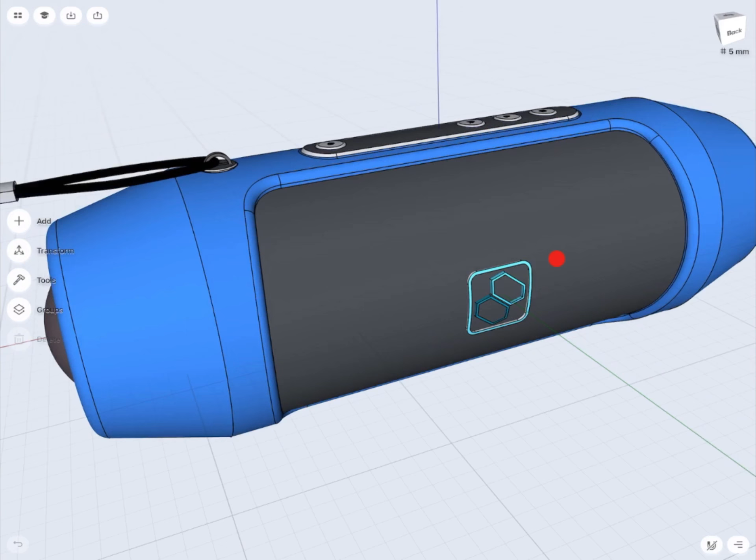Welcome to my lesson. Today we're going to make a speaker tutorial. We'll go through a couple of stages and repeatedly use them to make different parts of the speaker: the speaker itself, control panel, safety strap, and the logo. We'll use extrude commands, revolve, sweep, and loft on profiles we make as sketches, learn how to use a coordinate system to operate our design, and use planes, modifying them to draw sketches on.

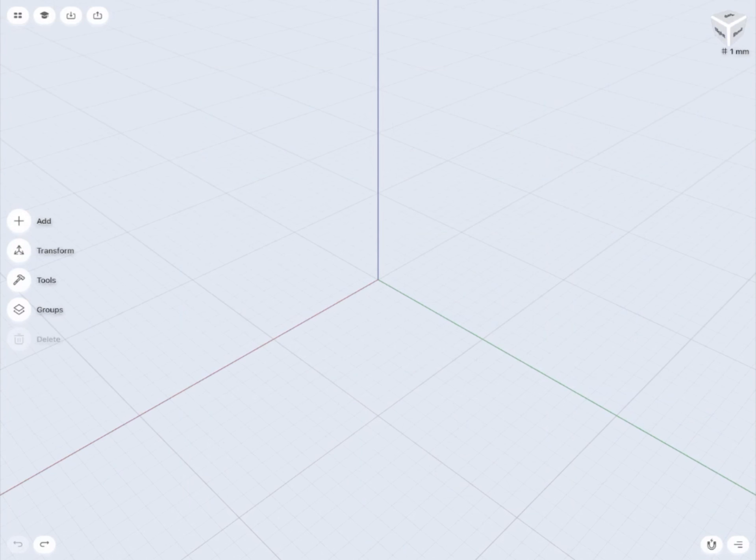Let's start. First we're going to open a new file and start to make our speaker profile. I'm not going to make a whole speaker, so I'm going to use the revolve tool, so just half of it is enough. You can use dimensions as I did, but you can also measure your own speaker at home and try to copy it.

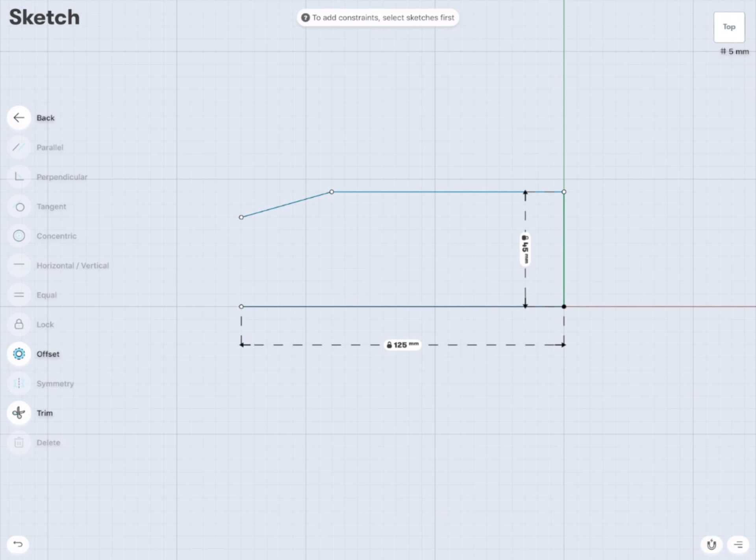Basically all we need is just a quarter of our speaker, because it's symmetrical in two axes. So the sketch I have right now is actually enough to start making the speaker. Now I need to make a mirror. Be sure to select copy from the top left box. Then you can use the revolve tool to make the shape of your speaker.

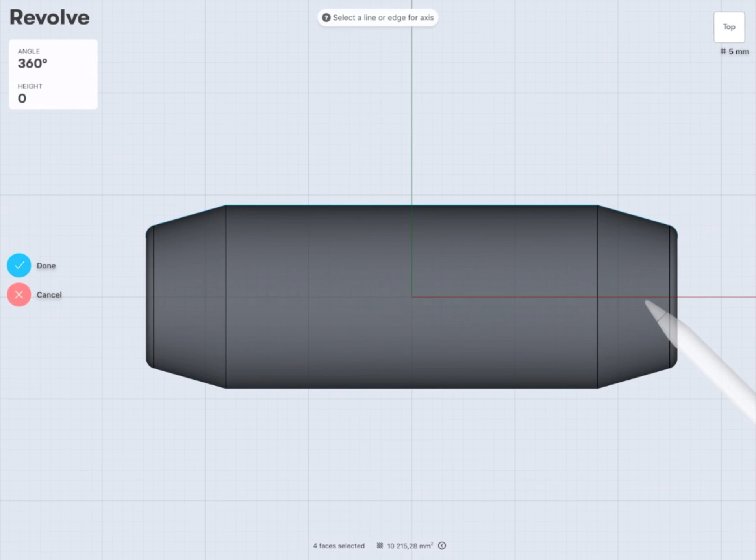So now we've got it. This is the basic shape of my speaker. I think my bass speakers are a little too small, so I'll delete one and try to scale it a little bit.

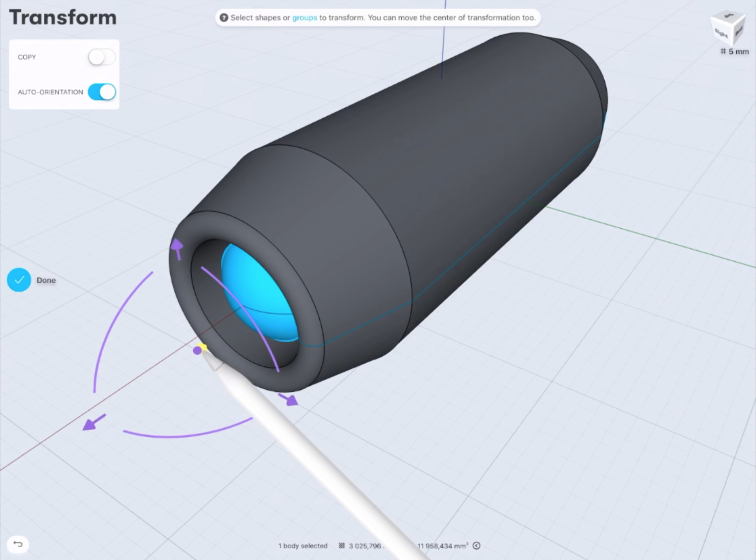I have to put my center of transformation inside my shape because it's round, then I'm going to scale according to that point. This is important because otherwise you will lose your symmetry. I'm happy with that.

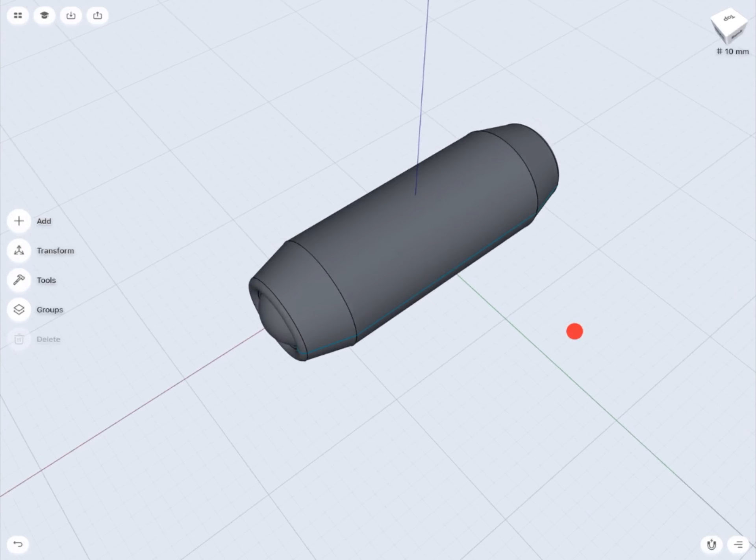Now I'll create a line. As you probably spotted, I've put this line on the axis, and this line helps me to make a mirror of my bass speaker.

Now I need to put the bass speakers on a layer because I don't need it right now. If you want to rename a layer, you just need to swipe your pen to the left, and then you are able to change the name.

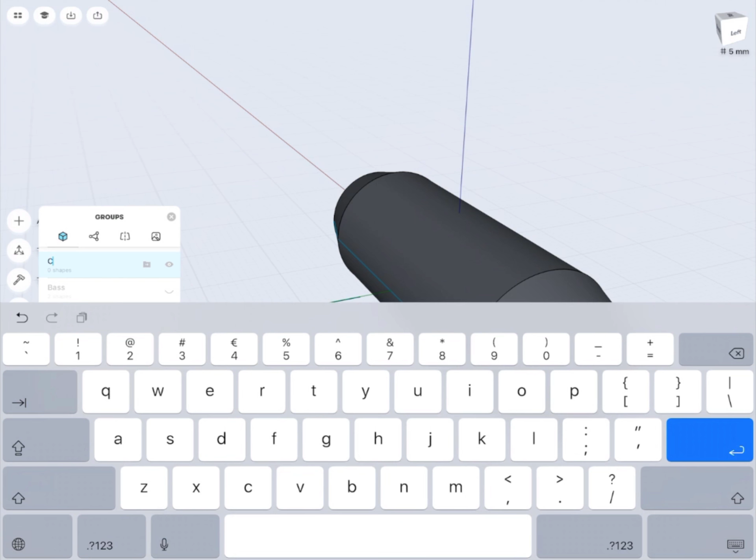For future purposes, I'm going to create a new layer, and I called it cut tool. So from now on, anything I create will be a cutting tool if I'm selecting the groups, for example. You'll see later how it works.

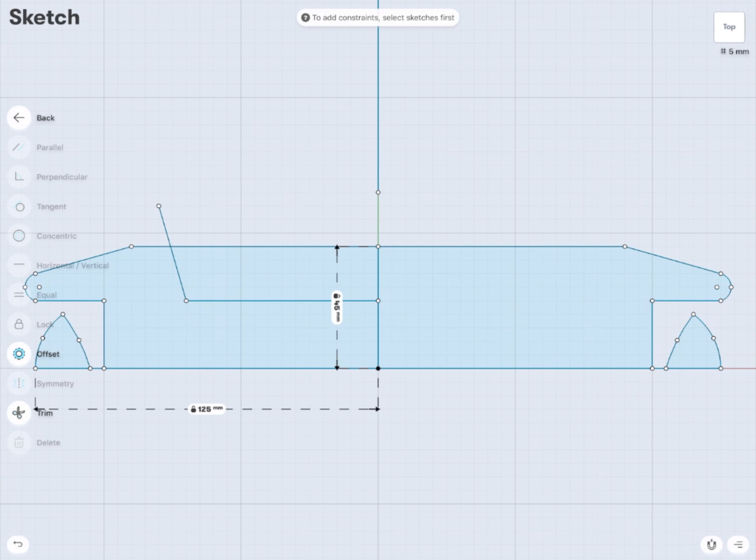Okay, let's start to create the speaker shape. This is going to be a profile of my speaker. I'm going to adjust it a little bit, and now I need to mirror that because I need it to be symmetrical. Don't forget to select copy from the selecting box.

Okay, we're done. Now I'm going to extrude that shape. As you see, it's placed on the cut tool layer. If I unhide my speaker, I'm going to use it as a cut tool to cut from my speaker.

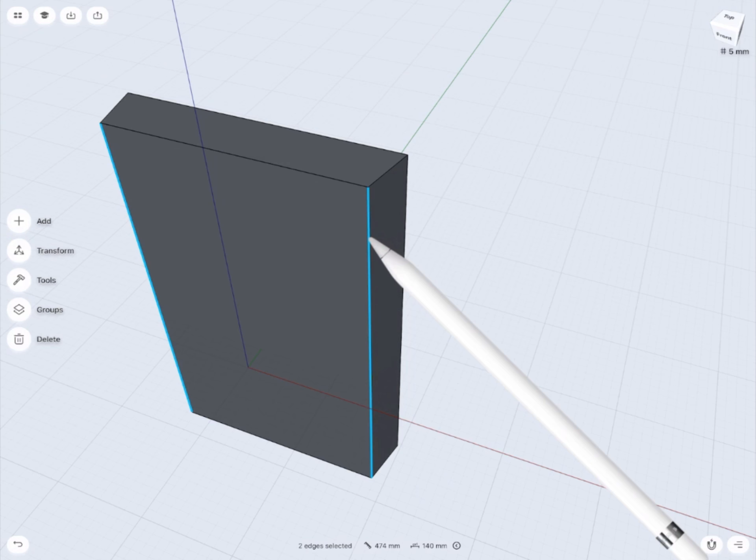I think I'm going to make a little bit of filleting because it's not that sharp, so I'm going to just fillet that. Then unhide the speaker, and now I need to make a mirror to the other side of my symmetrical speaker.

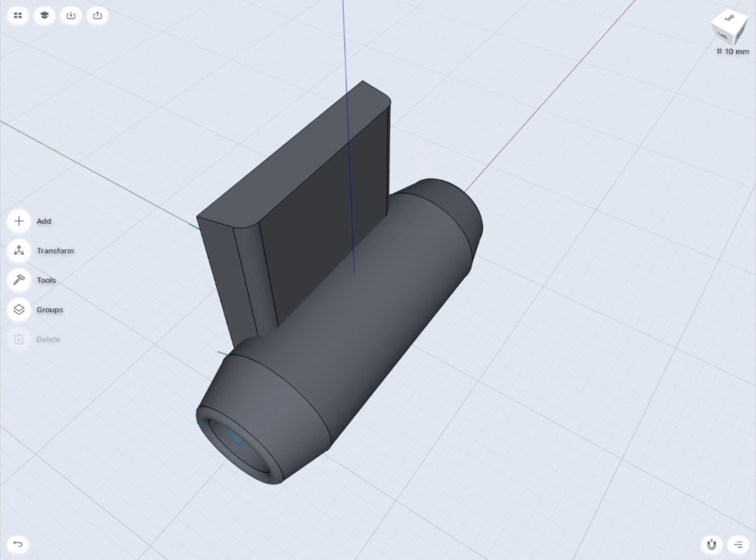As a constraint to help you mirror this, you can use existing sketches or an existing line, as you see right now — I've used the sketch I previously made. Now I can subtract, but remember to first select the object you are subtracting in, and then the object you are subtracting with.

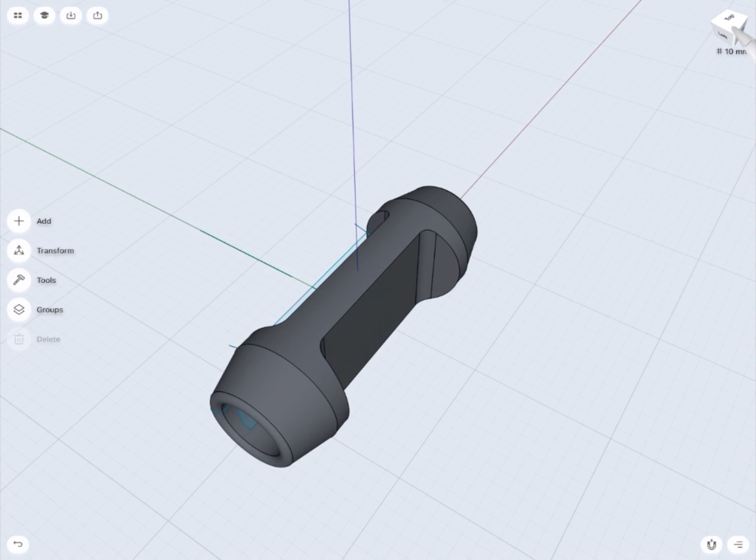Now I'll create the round shape to make it infill like a net for my speaker, aligning it to the speaker — as you see, it's actually automatically snapping. I like to lock the middle of my sketch, so to do it I just select the center of the sketch and press the black lock, and then anything I scale, which I'm doing right now, will be according to that point. So extrude it, just press and pull.

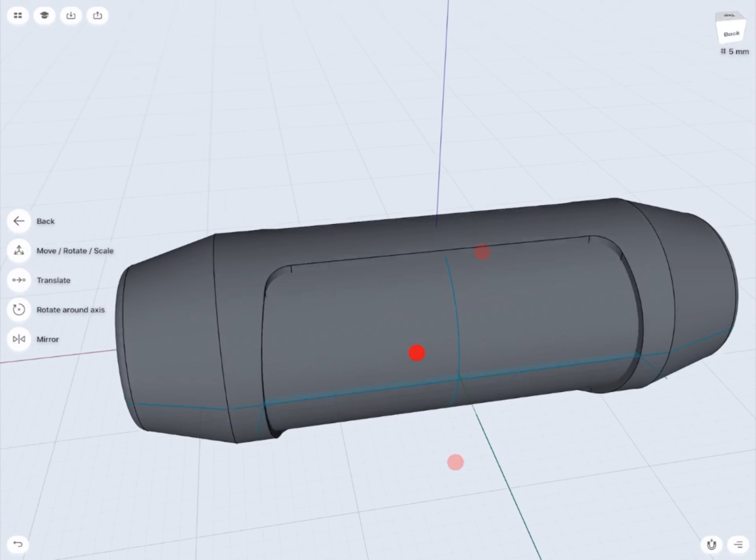Now I'm going to select the edge of my speaker and make small fillets. As you see, you don't have to select the whole loop, you just need to select one edge of it, and then the selection is automatically applied.

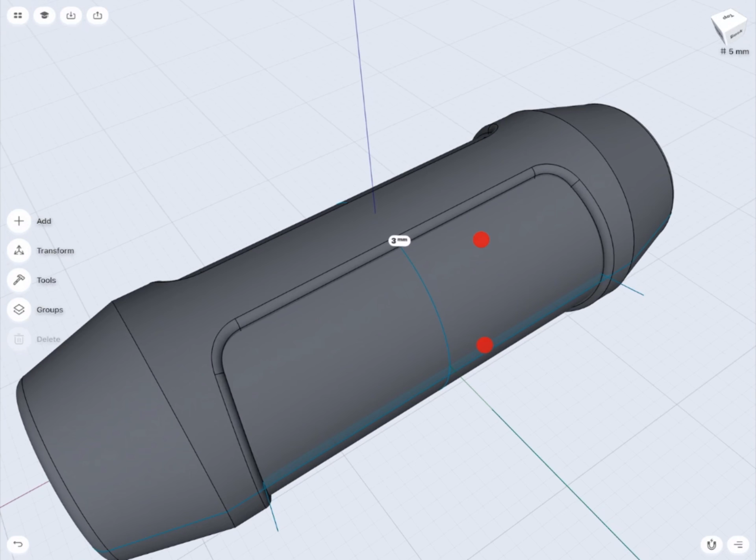So now I just need to merge them all together. To do it, I need to make a union, and now it's one part.

So my speaker shape is done. Now I need to create a control panel.

To do it, I need to create a construction plane. To do so, I will create a line, and out of this line I'll create a plane, and I'll do it through edge by selecting a certain angle.

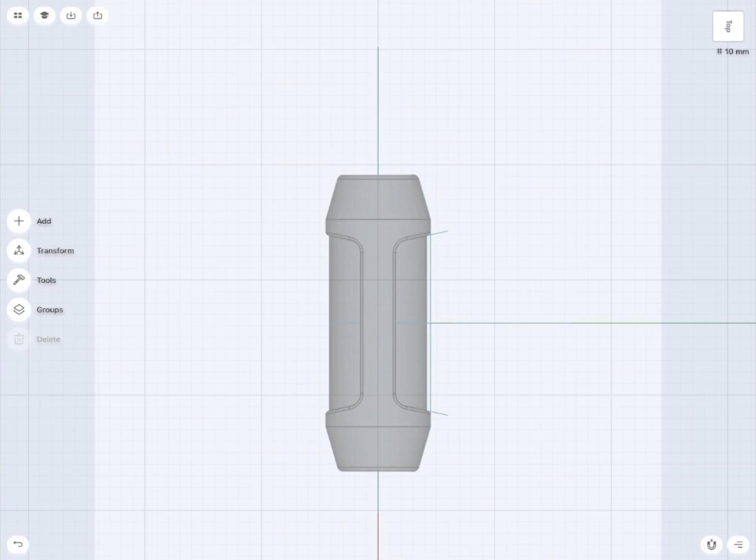I like that feature of moving planes anywhere I like. It helps me to make sketches wherever I want.

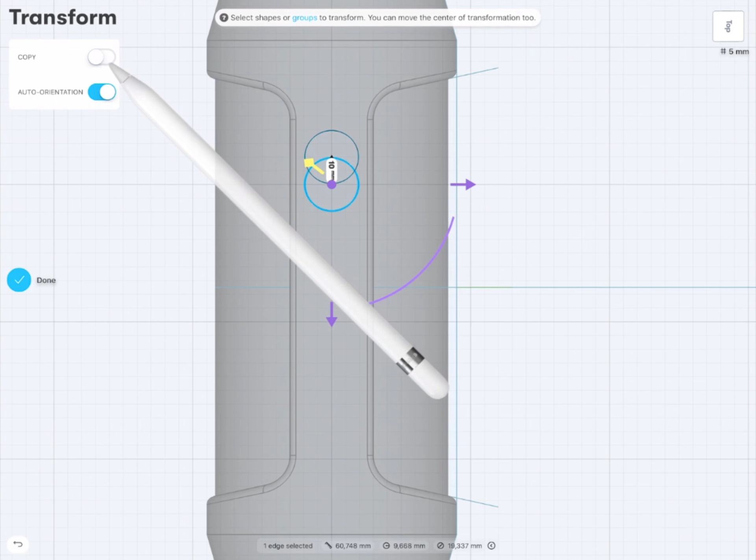So in this situation, I'm going to place the panel. First I'm going to create the base, which is the very long bar, and on this bar I'm going to place 4 buttons: stop, play, forward, and turn on off.

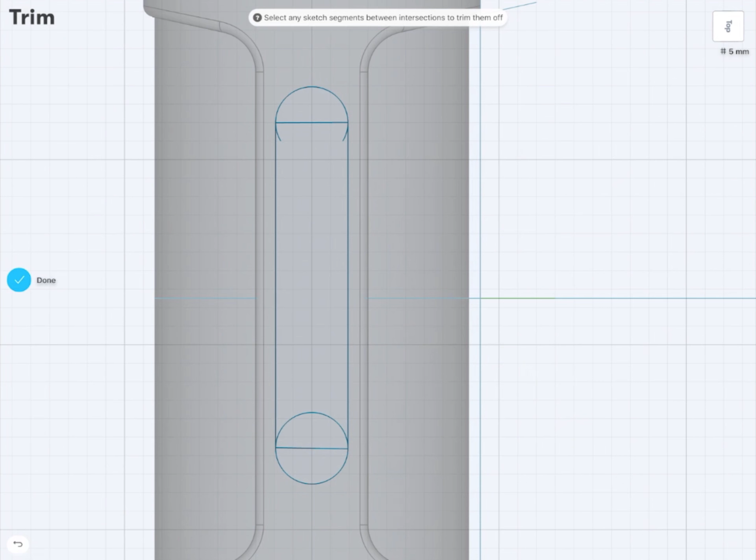A little bit of trimming. So what I do right now is offset.

So I've created this shape, and I'm going to make a very tiny gap, which is a very technical gap. And I'm going to extrude that, and subtract it from the speaker. Then I'm going to adjust the height of the leftover in the middle bar.

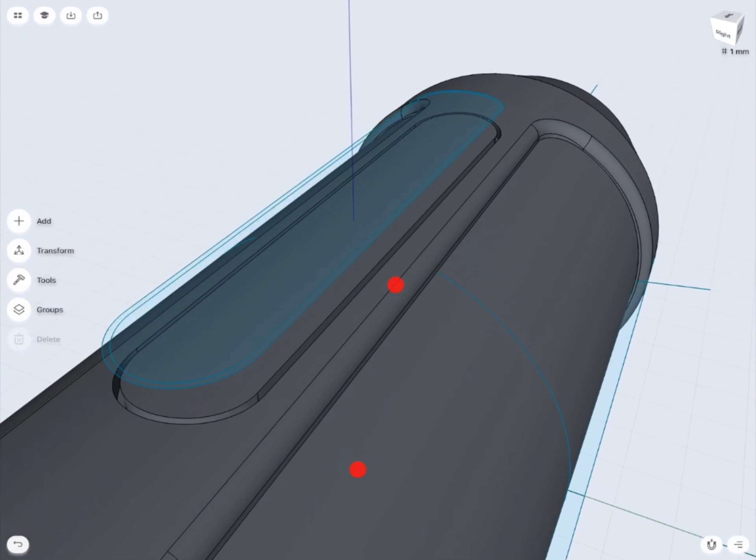As you see right now, I'm going to select the face of the inside shape, and pull it a little bit up to make it higher.

At the end, I'm going to chamfer by pulling the edge using Apple Pencil. So the chamfer will give another realistic point.

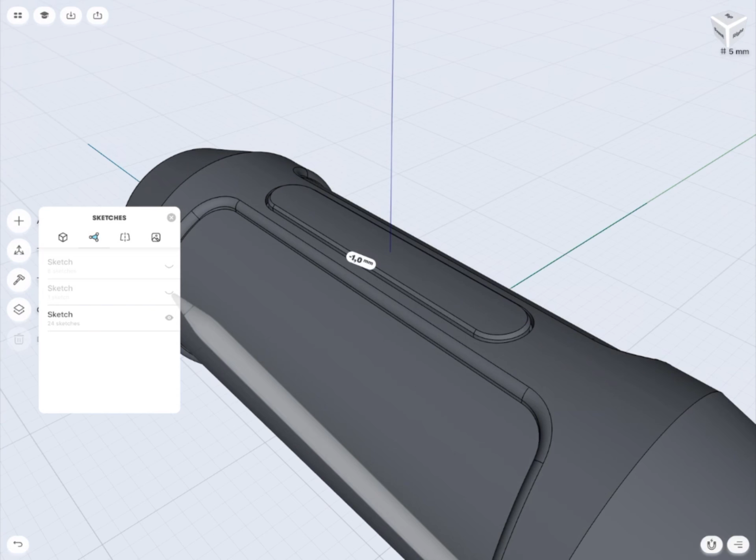Now I'm going to unselect all the sketches I don't need right now, and go back to my sketch to add some more shapes.

I'm going to create a round shape, a circle.

And I'm going to copy them 4 times according to the same gap, and make an offset to create shapes which I will use to make technical gaps.

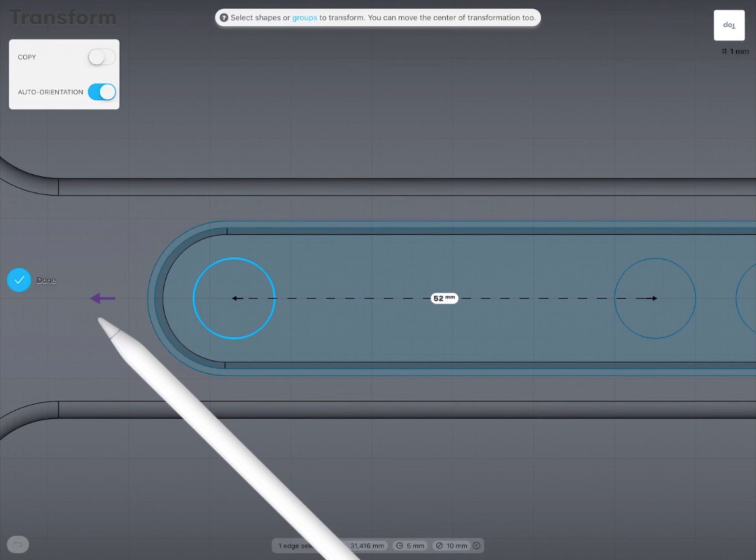So most of the commands, as you see right now, have this number box on the left top corner where you can place your specific dimension very accurately if you need it, and this will keep your design as precise as you want it to be.

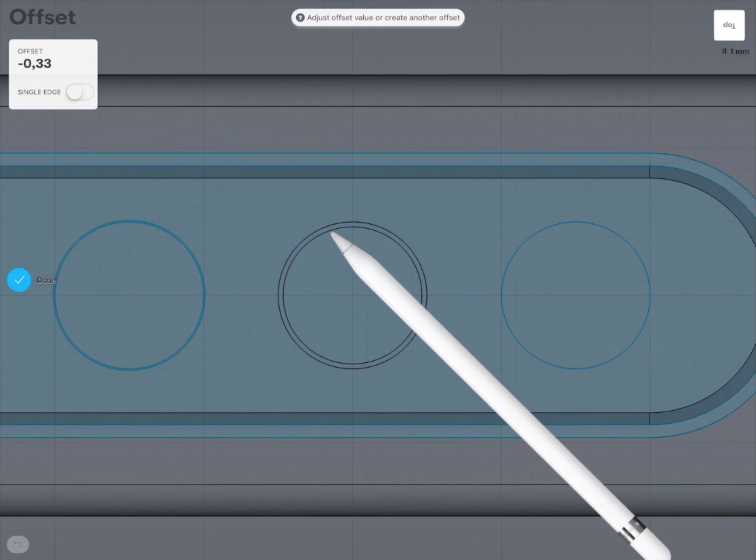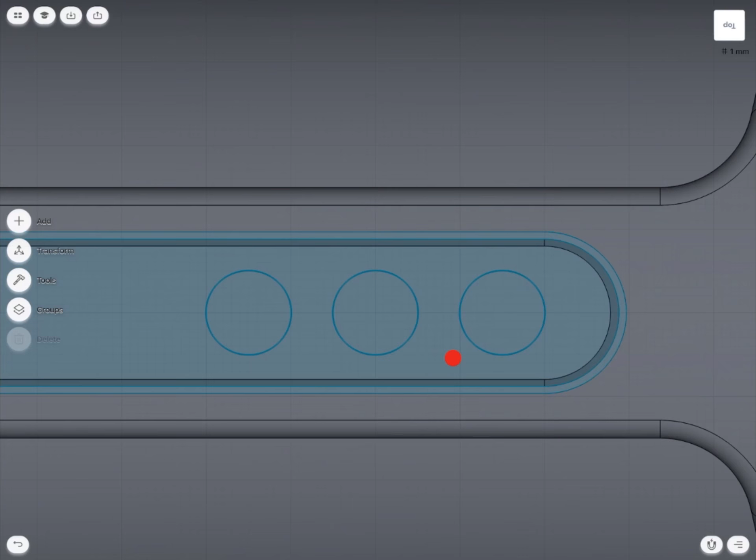So another feature I like in Shapr3D is actually the zooming. I like this two-finger zooming. You can zoom in very close to the objects you want to select, then zoom out and move at the same time. You can do it very quickly and efficiently.

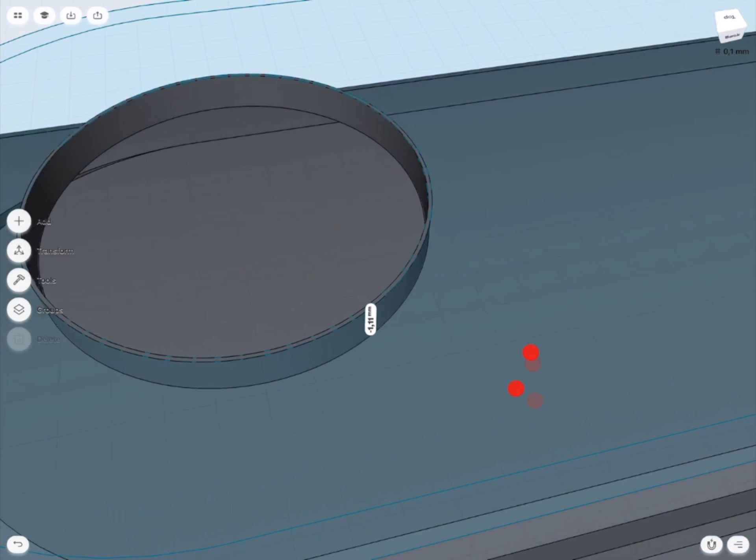So as you see, I'm going to extrude it right now, the same as I did with the bar. Anything I've created is on the top layer, which is the cut tool. Now I will show you how to cut using groups.

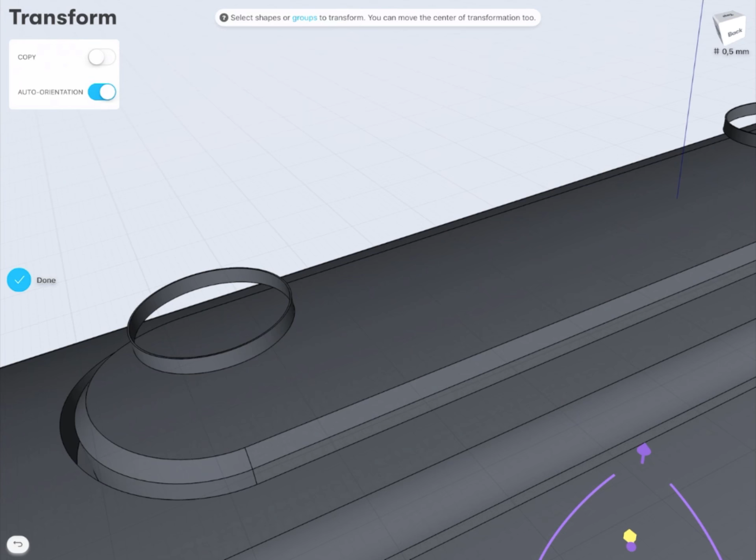So I need to transform these shapes a little bit towards the bar. I've used the group to select that object, and then I'm going to subtract, and as you can see right now, as a cutting tool, I'm going to use the cut layer, which is a layer that contains any cutting object.

And now if you get closer, you see what I've done. It's a small gap between the button and the bar. Now I'm going to select the edges of the buttons and make a fillet.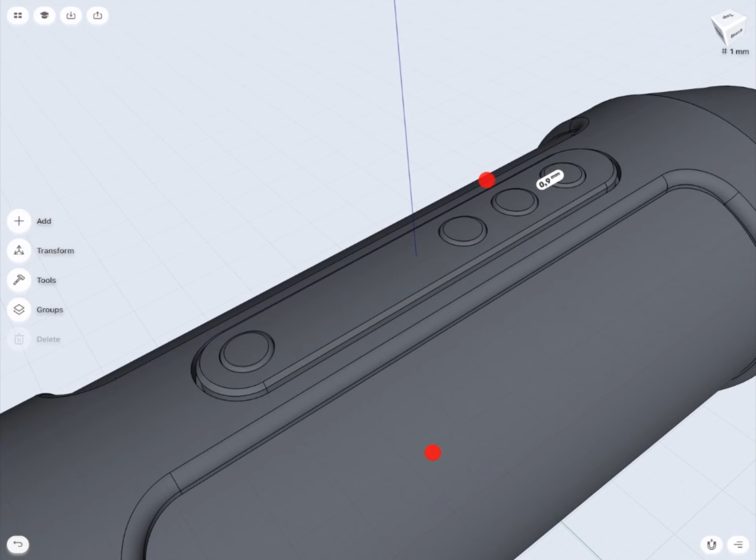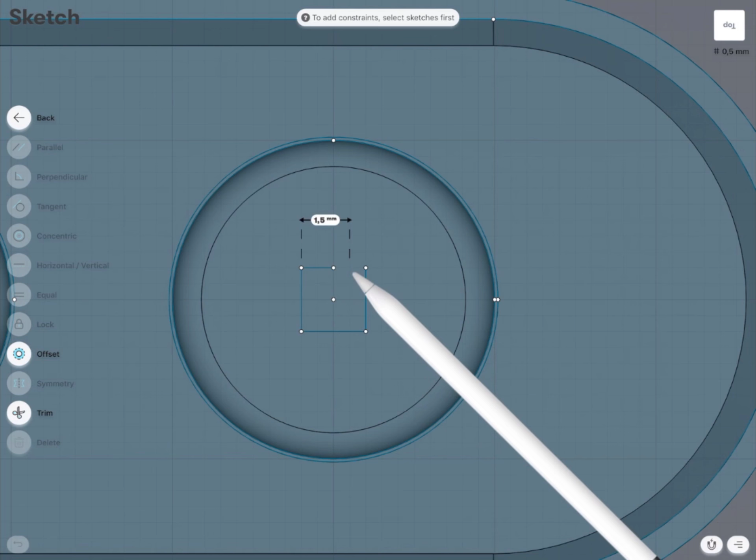So I'm going to recall my sketch, which I've been using to make all of this design. Actually, you can make the sketch in one go at the beginning of the process, but sometimes I prefer to follow my imagination and do it one by one, as you see right now. But it depends on you.

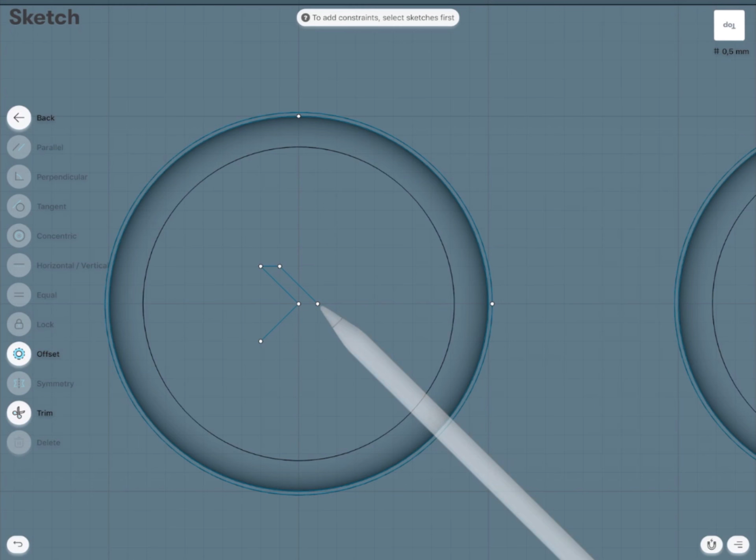So now you see how easy it is to sketch simple geometry. If you have your snapping on, it's just drawing. But if you see on the right bottom corner, there's like a magnet logo, you can switch it off if you need to make it more freestyle.

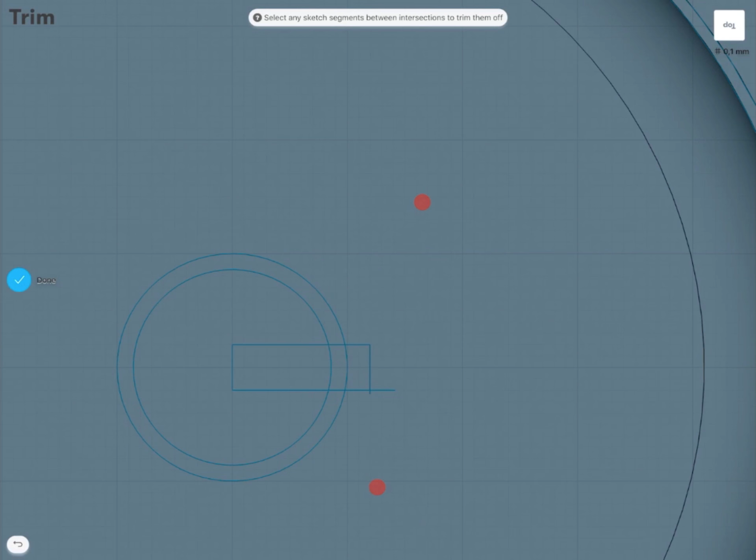So basically the sketching is very easy because all the time you're using the same tools, which is creating a line, creating an arc, trimming, offsetting, and basically that's it. Sometimes you're making mirrors, but this is from the transform tools.

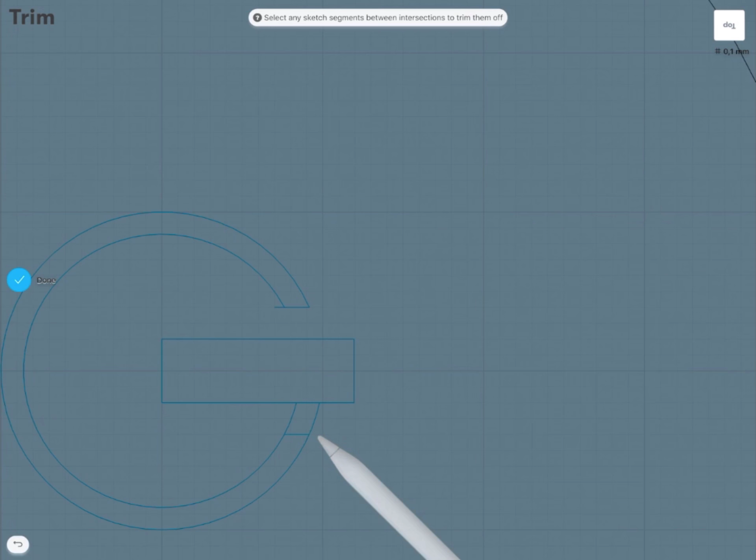So I need to select anything I've created, and I'm going to extrude it just by pulling. You just hold with your pen on the screen and pull down, and this is going to be extruded.

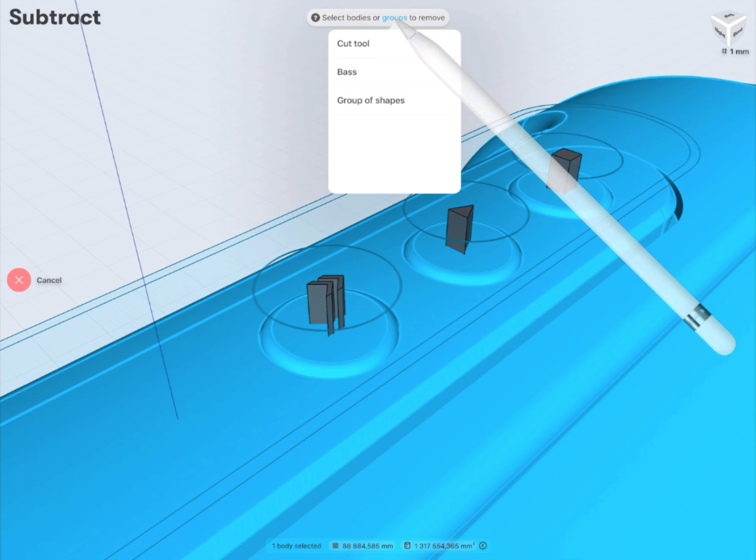As I mentioned earlier, anything I've created right now is placed on a cut tool layer. So if you're subtracting, you just need to select the group from the top, as I did right now. So it's done, it's so simple. Okay, the panel tool is basically done.

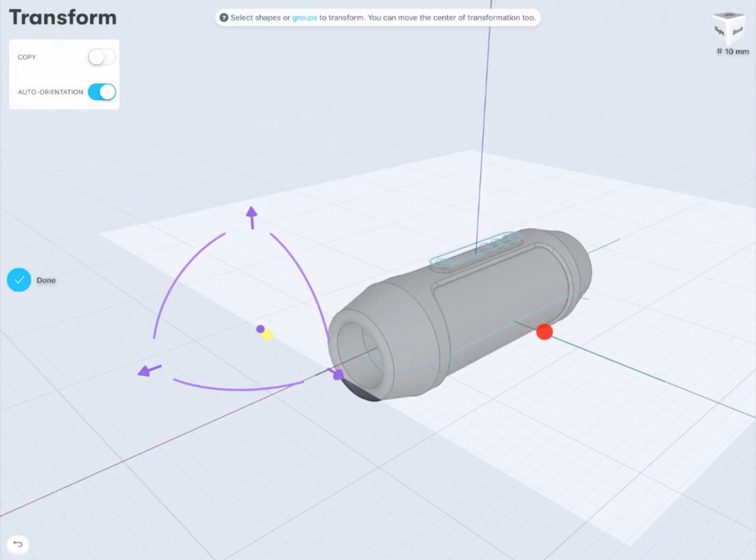So now I need to create a safety strap. To do so, I will use construction plane I've already used before. I'll just rotate this according to zero point, as you can see, and now I'm going to double tap on the plane.

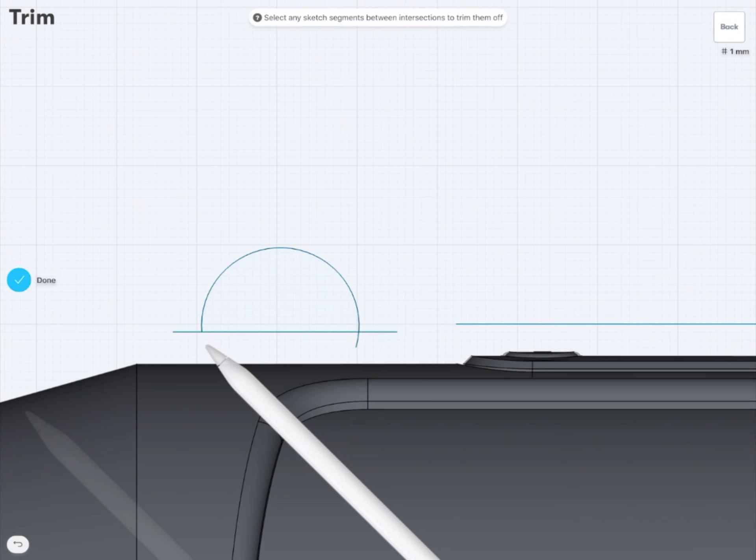Now I'm going to create the profiles to make the mounting strap solids. Basically anything I'm doing right now we already did on a previous design. So in a kind of conceptual process, I don't care to be really precise.

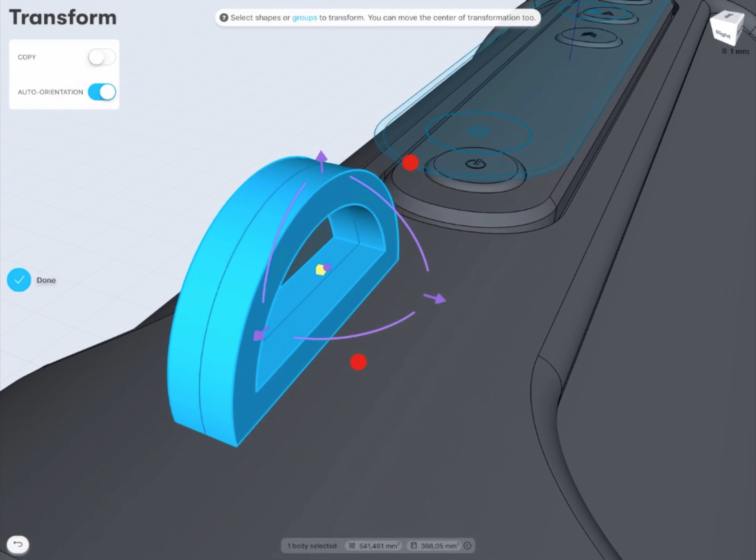I prefer to do and then to transform, so as it is right now in this situation. So I create this mounting object, and then I'm going to transform it a little bit. You can do it anytime you like. As you see, it's a little bit too big, so I'm just going to scale it according to the center point of the edge, the middle point of the edge.

So I like to do it this way because it kind of frees my mind. All the time I need to change something, I'm just doing it.

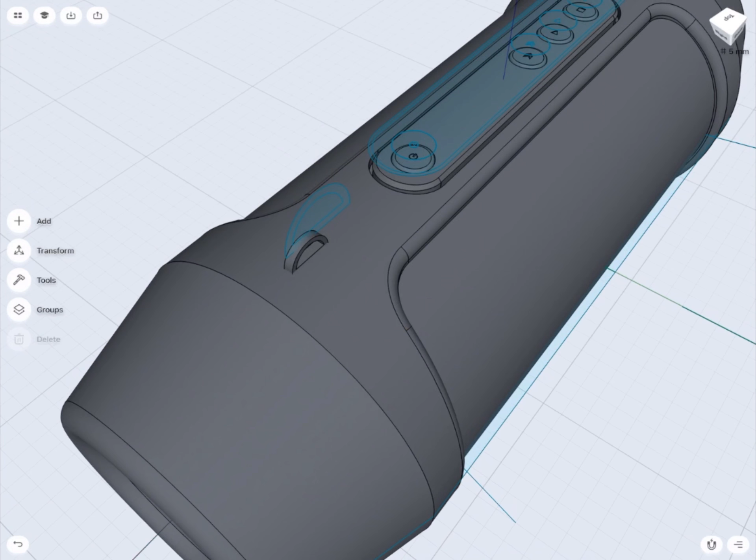So now I'm going to create the base for this mounting hook. This is going to be similar to my buttons, because I want to keep this design the same.

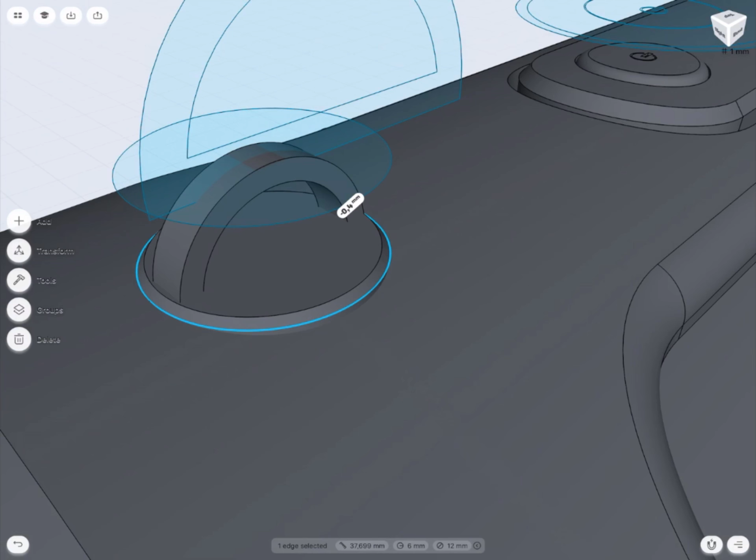As you can see, you can do it a different way, but I like to keep the gaps as is with the panel. As I told you, it makes this design look much more realistic.

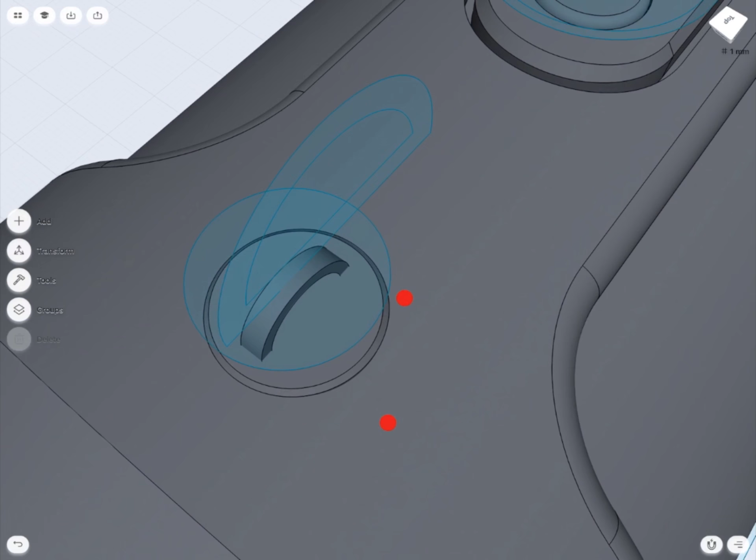And yet again, I think it might be a little bit smaller, so I can just transform that according to scale. Now I'm going to create the gaps, which first need an offset, as you see right now.

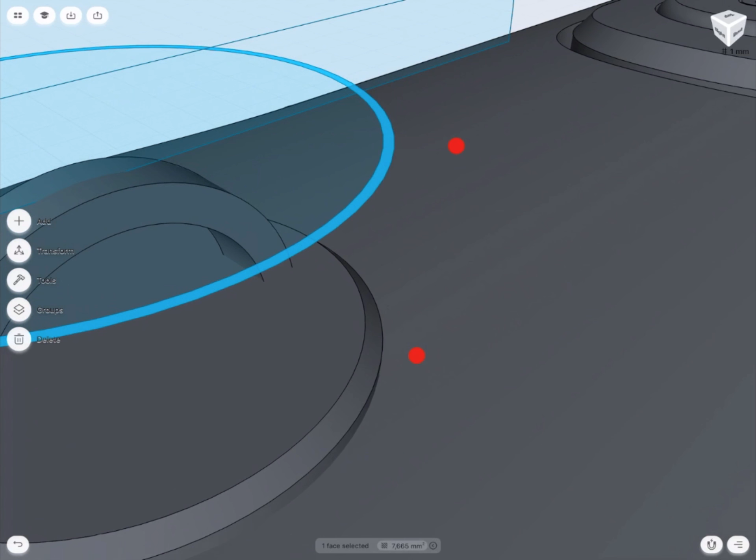Okay, it's done, it looks great. So now the next step, which is the string, or strap, however you like to call it.

So basically now I'm going to turn on the plane I've created, the strap mounting fixing object, and then I'm going to, as you can see, rotate this.

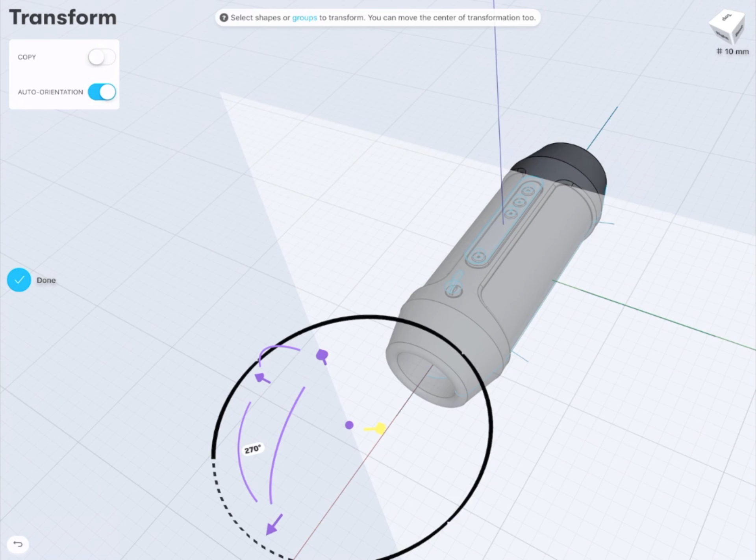So I'm going to place this plane in the middle of the strap, I mean in a place where two loops are connecting to each other with a small plastic button or something like this.

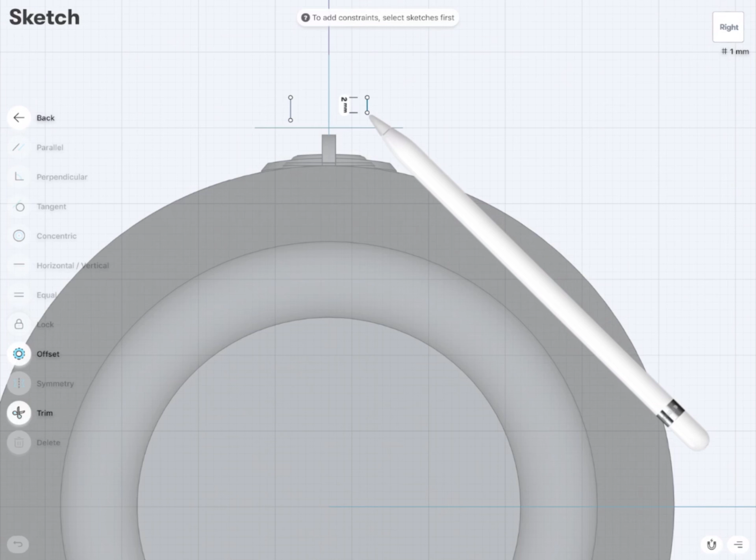So I need to create the shape of this button right now. It's going to be more squarey, so I'm going to use the arcs.

Creating arcs is great using pencil. You just need to make a slight move towards the curvature of the arc, and then the arc is going to be placed.

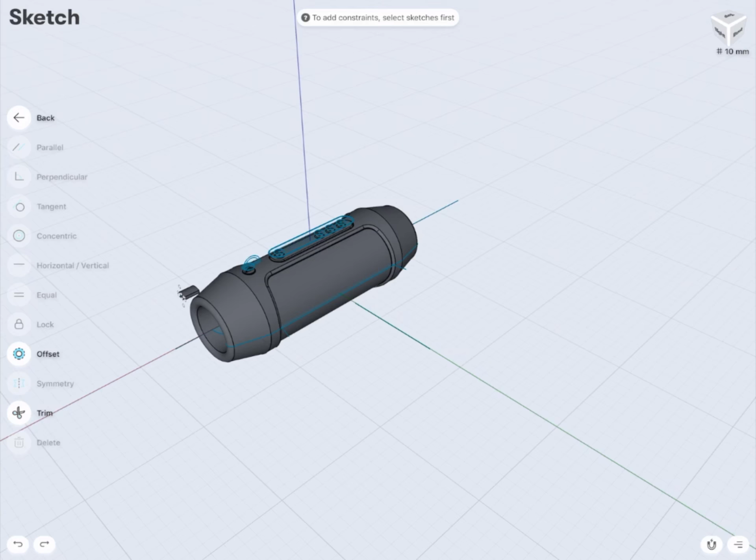So now actually I will use one of the faces of this plastic button and double tap on it, and then I'll create a sketch on it, and then I'm going to create the profile I'm going to use to make a sweep tool.

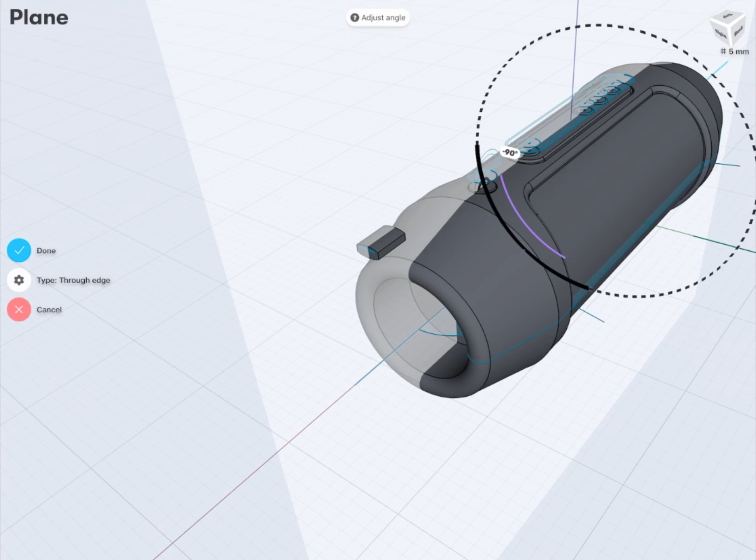So to create the plane, I'll actually borrow the line which is already created, and then I'm going to make another plane, a construction plane, which helps me make the profile of the strap, as I'm doing right now.

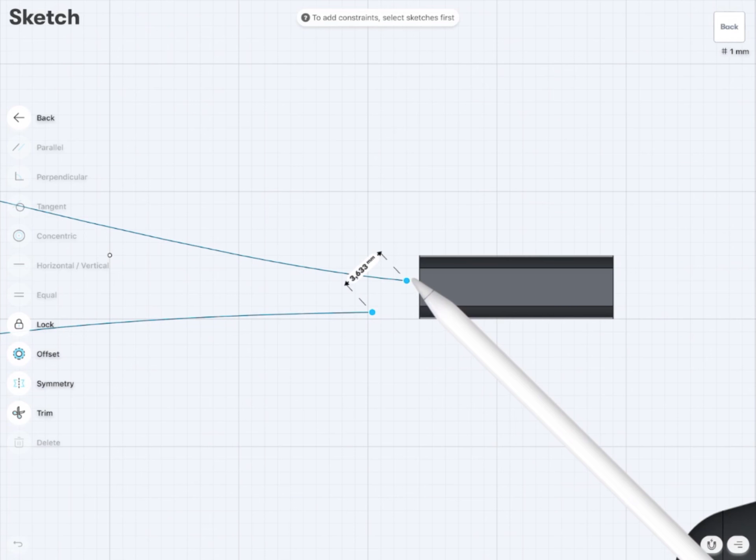So to make the profile, you just need to make the control point curve. Make this control point curve as natural as you can. You can adjust the points by just selecting them and moving, as I'm doing right now.

So remember, this is just conceptual work. You can play with it to make it as realistic as you need. And now I'm going to use the sweep tool.

Which I'm going to use for making that strap. So we just simply need to select the profile, and the profile is going to be selected according to that control point curve.

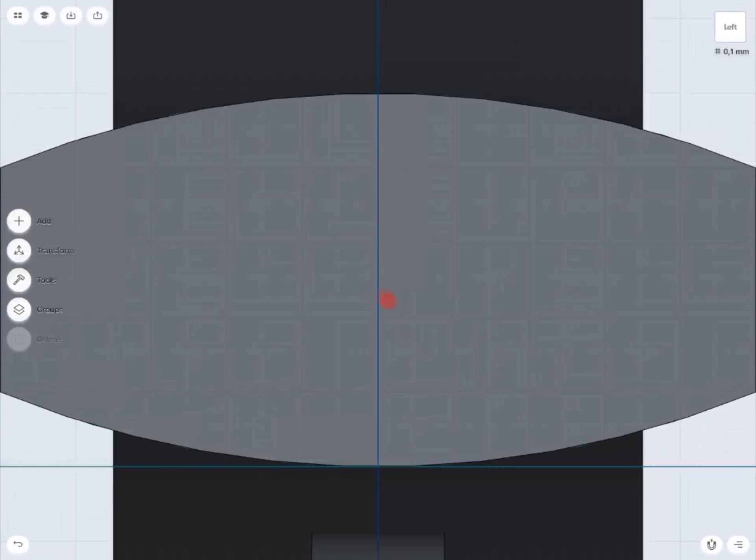Okay, and I'll do the same thing with the small strap, but this is going to be a round shape strap.

So you don't have to worry very much that the plane wasn't at the same level as your strap button. You can adjust the place of your strap later using the transform tool and move it according to the place you want it to be. And again, sweep tool and a little bit of adjustment.

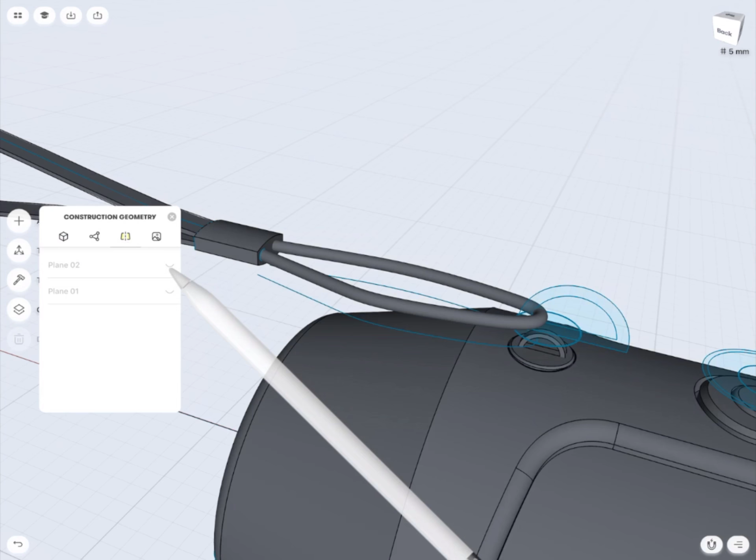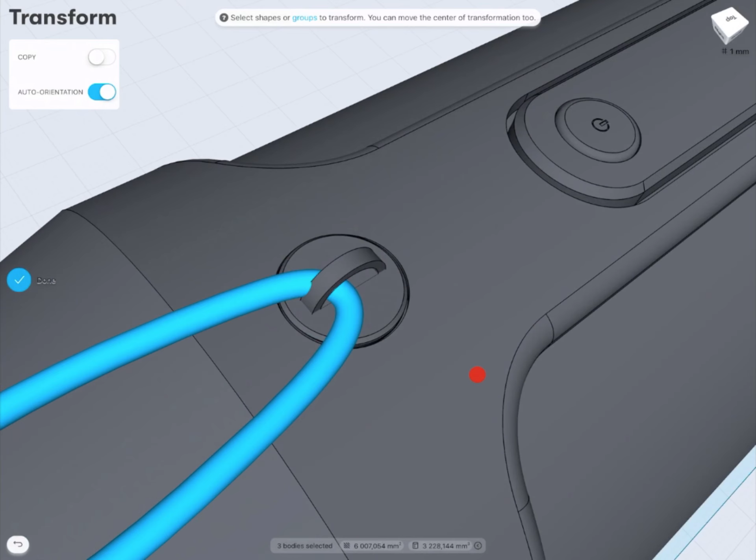So I decide to transform all of the objects a little bit towards the mounting. But you can also, in this case, rotate. You can change the rotation point, the red dot of the coordinate system, and then try to play with this a little bit more. Okay, it's done. It looks great.

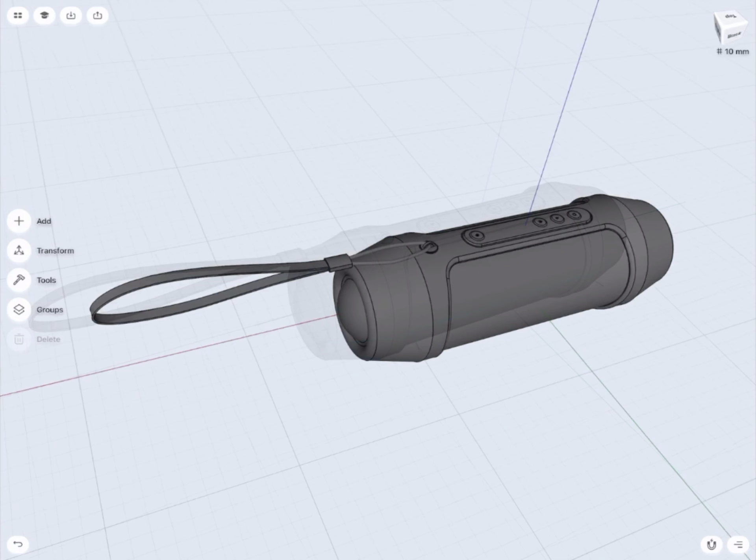Okay, so now I think it's time to make the last part, which is just a logo of my speaker. So the same, I need to create the plane. I need to put it in front of the speaker and just draw on it the shape of your logo. It can be anything you like.

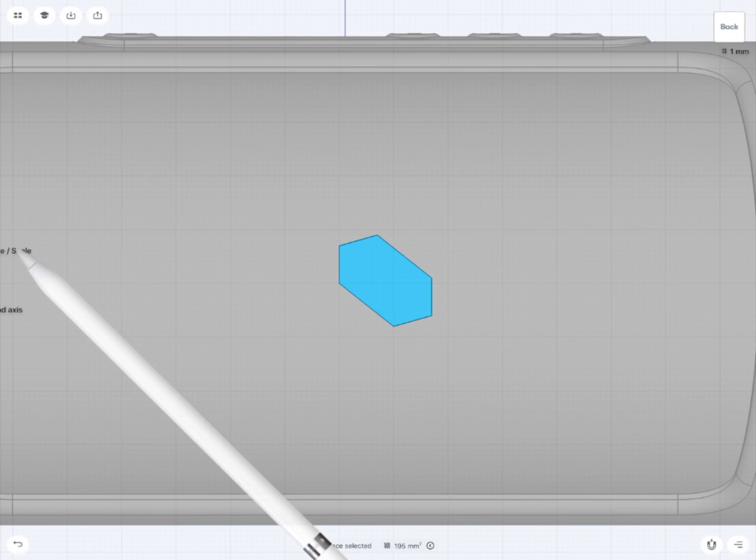So remember, if you want to make a sketch on a certain plane, you just need to tap twice on that plane, and then your view automatically switches perpendicular to that plane. So my logo will be kind of similar to the Shapr3D logo if you spot it. You can actually be creative right now and make your own logo wherever you like. It can be your initials, it can be anything.

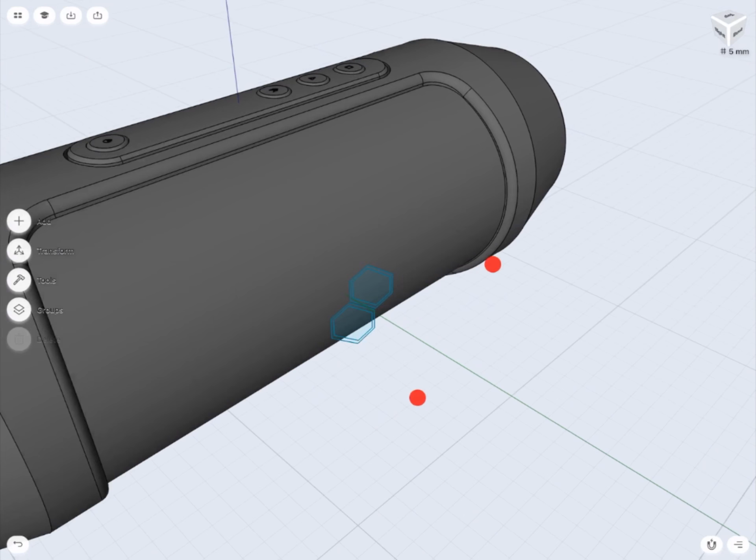So now it's time to extrude it to have it intersected with the speaker. So now I'm going to modify the logo shape a little bit to have this shape at the same curvature as the speaker. To do so, I need to create a plane, sketch the round circle according to the center of my speaker, and then cut it using intersection mode.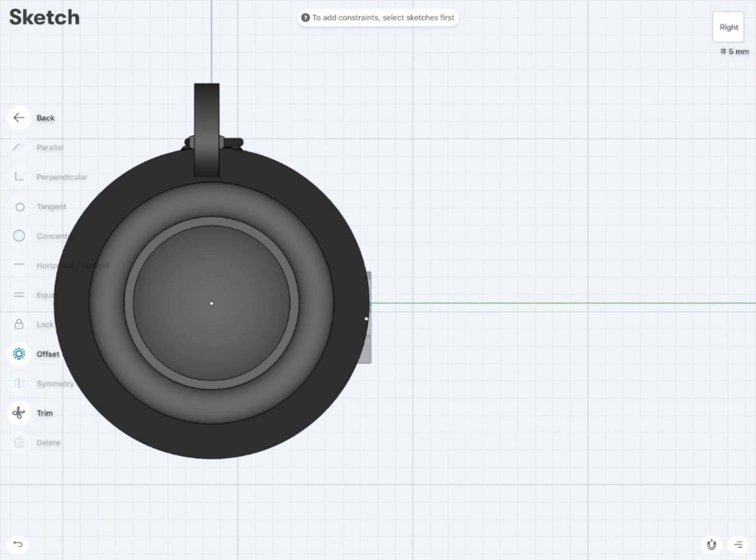So I'll create the circle. Now I'm going to turn on perspective mode, and then you see the sketch, and I'm going to extrude that. Okay, and I'm going to turn the plane off because it's disturbing me to make any operations. And I'm going to intersect as I'm doing right now. So anything that is intersected between those objects is going to be left.

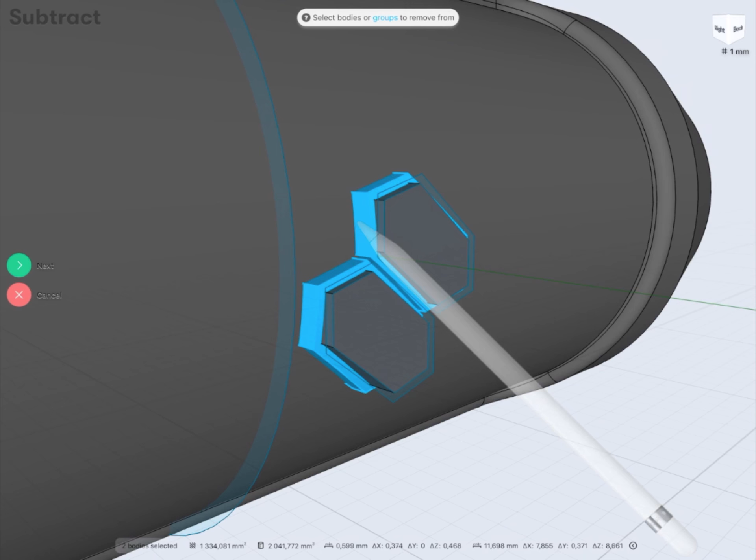And I'm going to cut it through and then subtract. Okay. And I'm going to place it in the center.

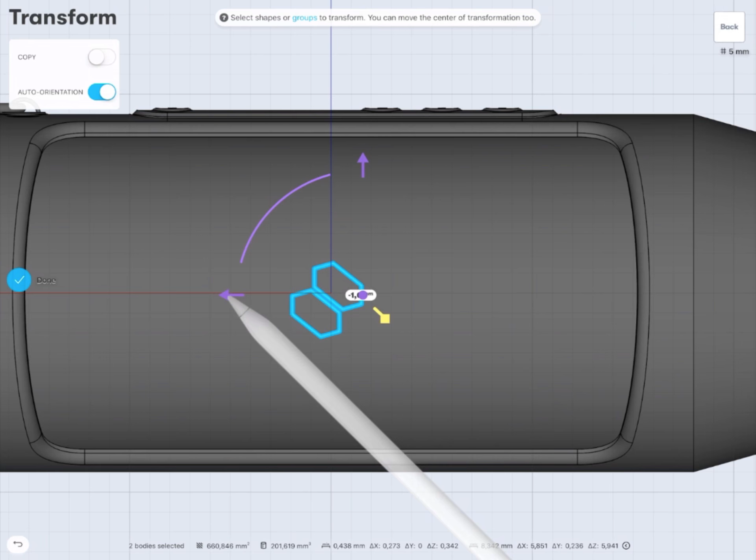Alright, I'm going to create the frame for that logo right now. So I will do the same plane. That's why I turn this plane on. And then I'm going to extrude it and do the same thing I've done with the logo.

As you see right now, basically to make a very advanced design, you just need to know a couple of commands. You don't need to have huge knowledge. Modeling in Shapr3D actually gives you that ability, as you see in my designing. So anything basically depends on your creativity. So this kind of tutorial really helps you develop your skills.

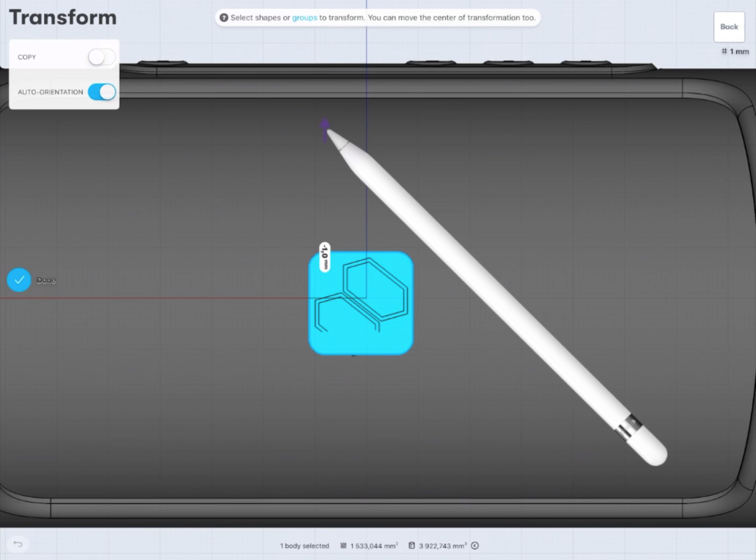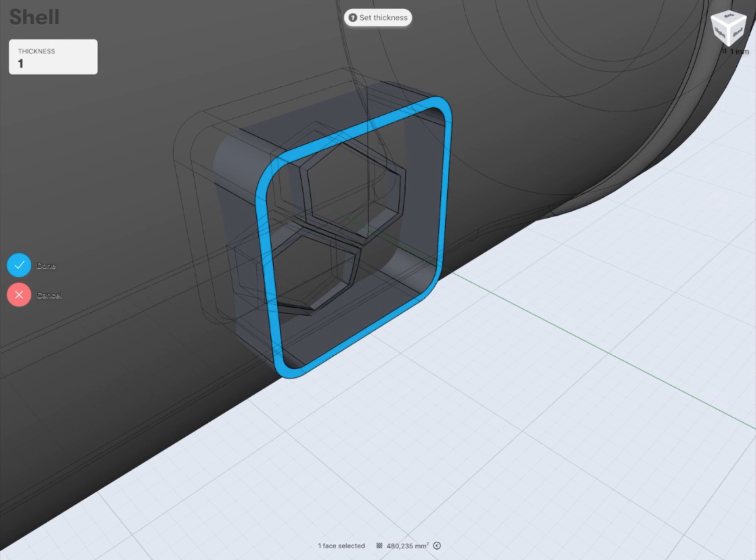So the last part is to make a shell with thickness 1 millimeter. And I'm going to adjust it according to my logo.

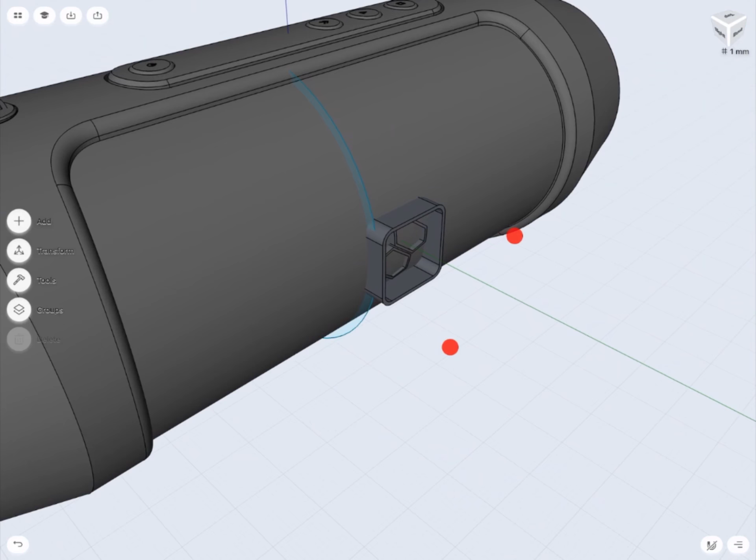And I will use the same sketch I used for the logo to make the curvature shape of my frame. So I need to extrude both sides. And again, I'm going to intersect those objects, and what's left is going to be the shape I needed.

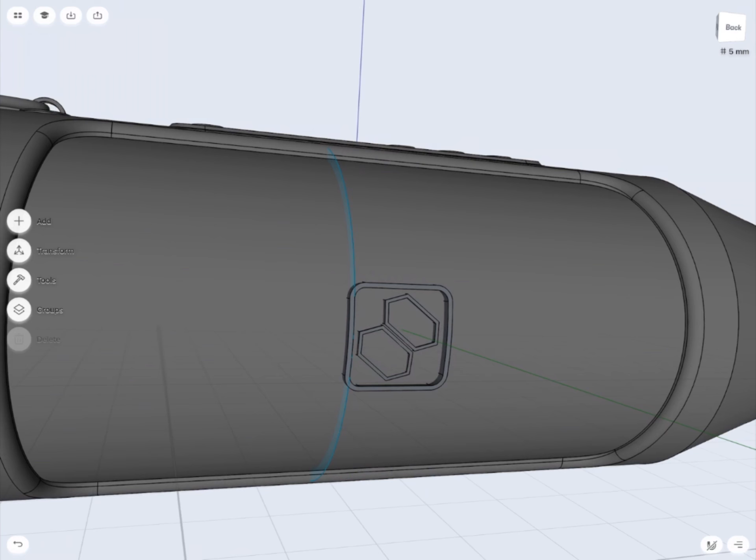So the last part is just to get rid of all of the sketches and planes from the stage. And I'll give just an overview to see if anything is okay. And it's time to put some colors on my design.

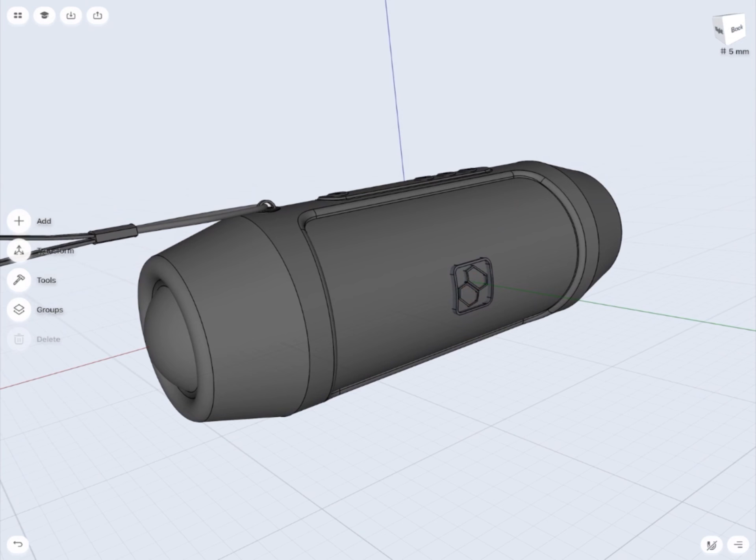So in this case, when you just make the small technical gaps, your design is all one piece. So you have to select first the outside general color and then go to details by selecting each surface separately. So this is my color version. You can use your own. You can play a little bit more with the palette, and then you'll see how it looks.

So remember, the edges are always reflecting the light. So I'm putting the white color on the edges. It actually, in this case, gives it a more realistic view. So we can actually make some experiments with your design, but I like to do it like so.

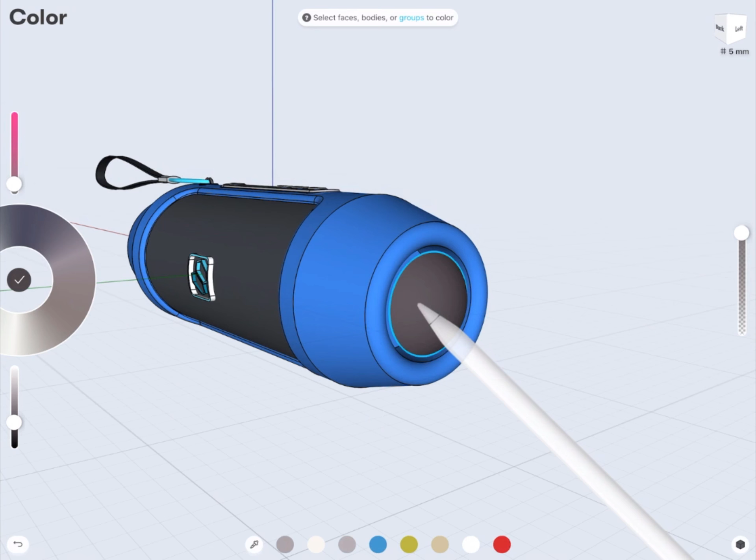We've done a great job in this lesson. As you probably spotted, we have been going through a couple of important commands and operations, which actually, when you're creative, you can use anywhere in any design you like. It's just a matter of your imagination.